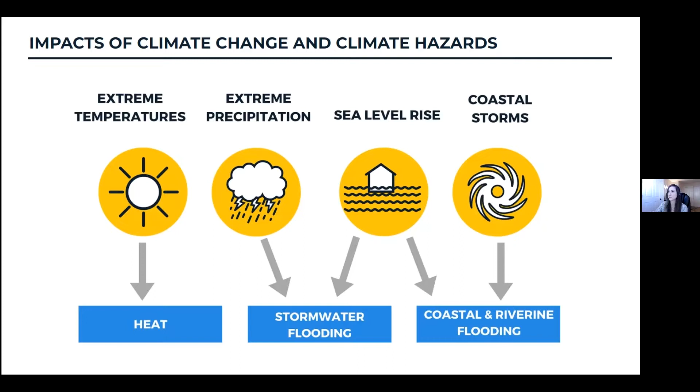In Boston, projections indicate that sea levels are likely to rise from 2013 levels by approximately 9 inches as early as 2030, and by approximately 36 inches by 2070. Plus, there will be an additional 4 inches of land subsidence, which is the gradual settling and sinking of land. Consequently, by 2070 we anticipate approximately 40 inches of sea level rise across the city, or about 3 feet, and storms of greater magnitudes will become more frequent and more intense.

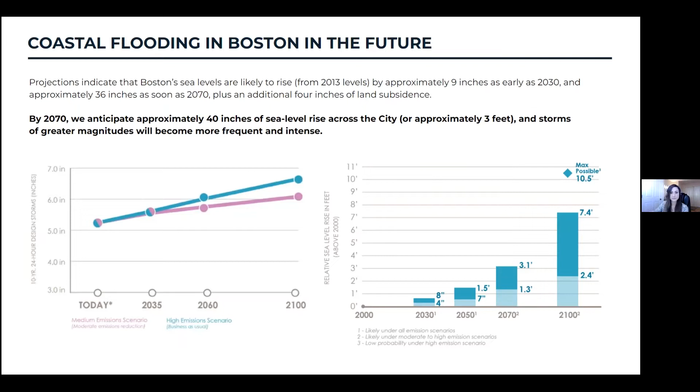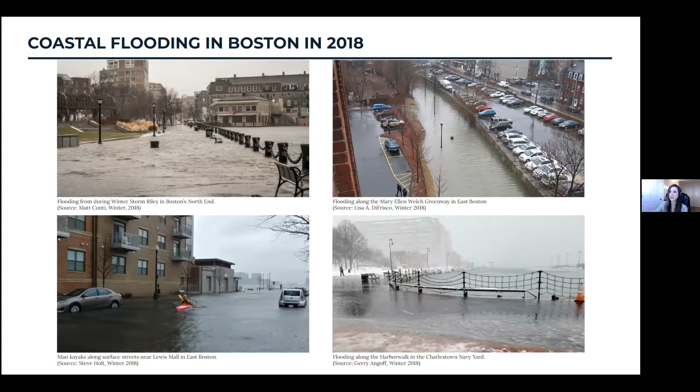The city is taking a layered approach to building resilience. We're working to adapt our buildings and infrastructure to withstand the impacts of flooding and extreme heat and better manage stormwater. We're working to prepare and connect our communities through education and engagement, updating local policy and zoning to reflect climate initiatives, and supporting economic development opportunities through green workforce development initiatives like the recently established Boston Power Corps. And we're working to protect the Boston coastline through our work on the Climate Ready Boston initiative.

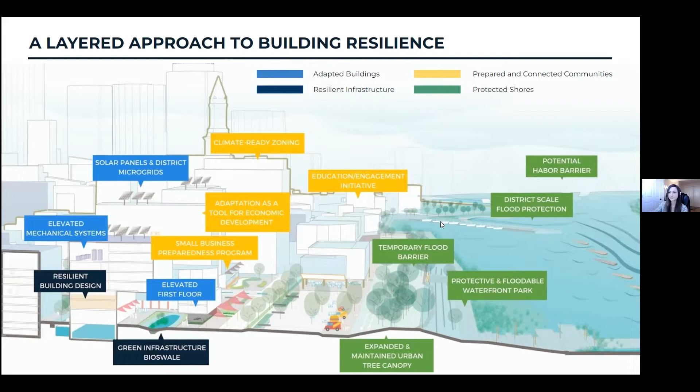For anyone who may not be familiar, and it sounds like we have a few folks in the room who are not, the Climate Ready Boston initiative began in 2016 with the release of the Climate Ready Boston report, which provided updated projections of climate change impacts in the future in Boston, an assessment of the city's vulnerability to those impacts, and a roadmap for adapting to these impacts across the city. Since 2016, this report has evolved into an ongoing initiative that until recently has been largely focused on coastal resilience planning for Boston's 5 coastal neighborhoods.

In 2017, we released the first phase of planning for East Boston and Charlestown. This was followed by a plan for South Boston in 2018, downtown, North End, and Dorchester in 2020, and the second phase of planning for East Boston and Charlestown, which was just completed in August of this year. We're very excited about the release of this recent phase 2 plan, because with the completion of coastal resilience solutions for East Boston and Charlestown phase 2, the city has developed resilience plans for all 47 miles of Boston's coastline.

I want to note that Climate Ready Boston is just one of many efforts across the city to build resilience, specifically looking at coastal flooding. For example, in 2018 the Public Works Department released its climate resilience design standards and guidelines for the protection of public right-of-ways. In 2019, the BPDA released coastal flood resilience design guidelines that provide guidance on building level adaptation strategies. And in 2021, these guidelines were formalized in the city's zoning code as the Coastal Flood Resilience Overlay District.

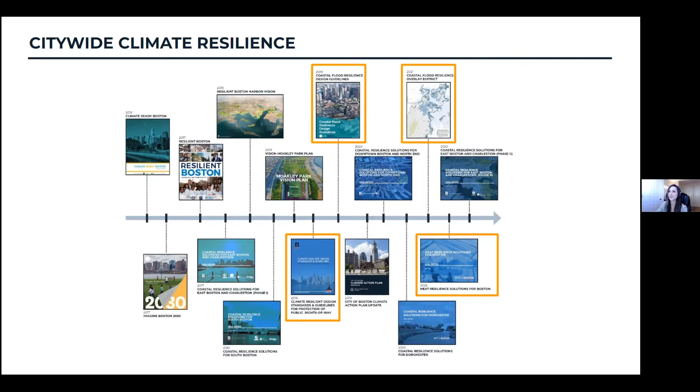All right, so now I'm going to share an overview of the 2 phases of coastal resilience solutions planning for East Boston and Charlestown. This map shows the delineation of the phase 1 and phase 2 study areas. Phase 1, shown in this peach colored line, covered the harbor facing portion of East Boston's waterfront along Jeffreys Point, the Maverick Square area, and the Border Street area.

As well as the northern area of Charlestown along the Mystic River. Phase 2, shown in the red line, built upon this first phase and covered East Boston's Chelsea Creek, around the border to Revere, the Belle Isle Marsh, Constitution Beach and Wood Island Marsh, as well as the Charlestown Navy Yard, the Little Mystic Channel, and the Boston Autoport.

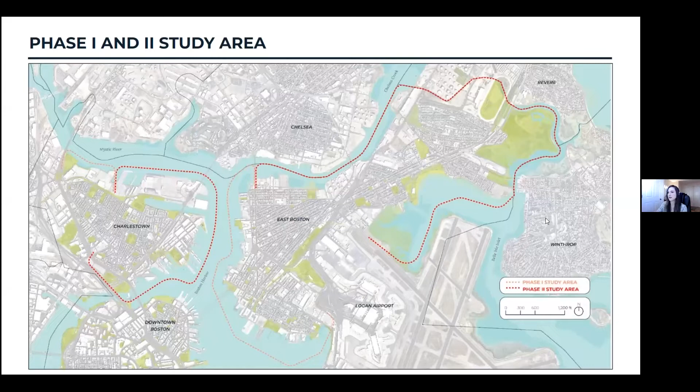So in case you're wondering why these 2 neighborhoods were divided into 2 phases, you wouldn't be the first to ask. While this was before my time with the city, the primary reason that the phase 1 study area was separated from the phase 2 study area was to address significant flood pathways in the phase 1 study area that present extensive near-term flood risk and really needed to be addressed early.

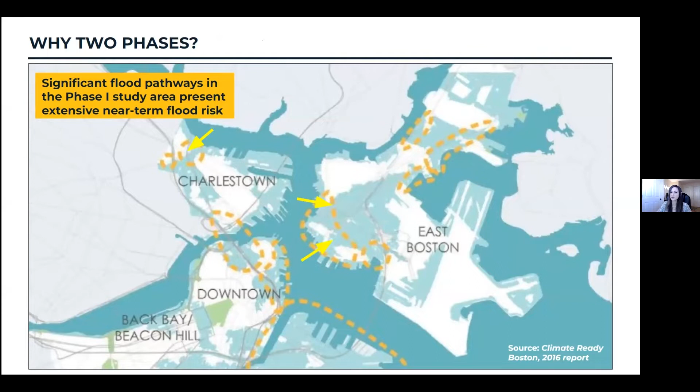With all of the coastal resilience solutions plans that we've been doing, there are essentially 3 key goals and objectives. The first is to identify the precise location and timing of flood risk in a given study area. Flood risk assessments in these plans include sea level rise projections, possible storm surge under different storm scenarios, and wave action and erosion.

It also includes identifying the ways in which flooding can occur, which include either fringe flooding or flood pathways. So fringe flooding typically impacts low-lying areas along the waterfront, whereas flood pathways allow water to travel from low-lying land on the waterfront to inland areas, which is especially concerning given that most inland structures and infrastructure are not designed with flooding in mind.

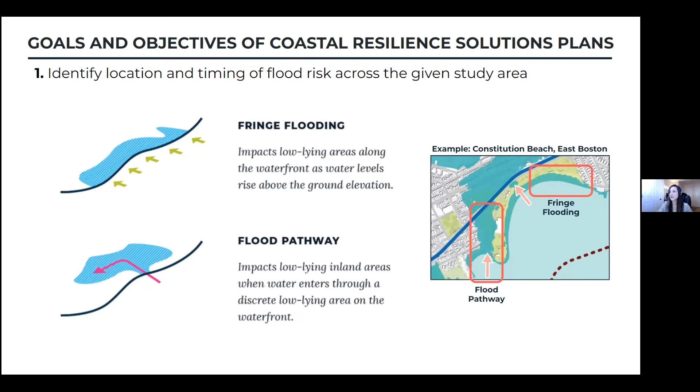So much of Climate Ready Boston's work focuses on blocking flood pathways and reducing fringe flooding by elevating vulnerable areas of the coastline to protect our communities.

So the images to the left show the location of projected flooding in the phase 1 study area, while the images to the right show the same for the phase 2 study area. These images present a near and long-term flood risk.

We consider nearer-term flood risk to include a 1% annual chance storm with 9 inches of sea level rise, which I mentioned earlier is anticipated around the year 2030, while longer-term flood risk includes a 1% annual chance storm with 36 inches of sea level rise that's anticipated around the year 2070.

And as you can see from these maps, without intervention, large sections of East Boston and Charlestown will be vulnerable to flooding at an increasingly frequent basis.

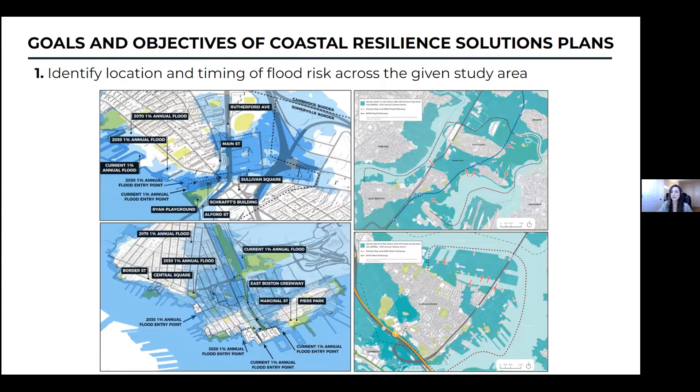The second goal of these plans is to engage stakeholders, including the local community, nonprofit organizations, city, state, and federal agencies, the private sector, and many more, to develop place-based coastal resilience solutions that provide multiple benefits for the respective community, such as increasing permeable open space and promoting multimodal transportation opportunities and enhancing access to the waterfront.

So strategies largely depend on the site-specific location and may include solutions such as waterfront parks, which you'll hear a bit about today, landscaped berms, flood walls, elevating the harbor walk or roadways, or nature-based solutions like restoring wetlands. These plans typically present preferred solutions that encapsulate the most community benefits and ecological benefits, as well as alternative options that would be effective but potentially less desirable.

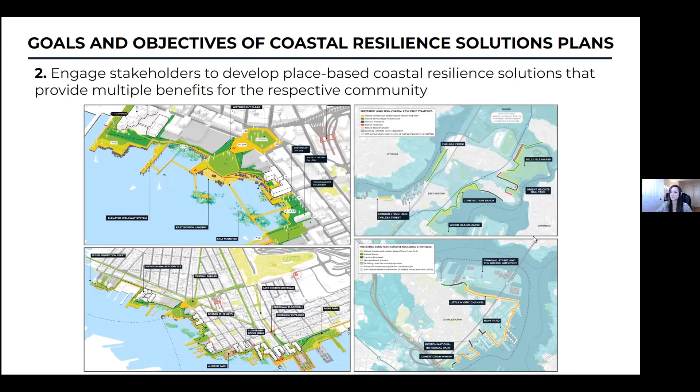All right, so I want to conclude my segment of this presentation by talking about what comes after the plans. The plans present conceptual designs that have been informed by significant community and stakeholder engagement and are deeply vetted for technical feasibility. And from there, each project must go through additional stages of design, engineering, and environmental permitting and compliance before it's ready for construction. And engagement with stakeholders spans all stages of these next steps and is critical for informing what the ultimate form that a given strategy will take.

I think that in doing this work as a planner, folks often worry that what they see in the plans are final and will begin construction as they're presented. But the plans are just the first step in the implementation process and aim to set a framework that comprehensively addresses risk across a large geography.

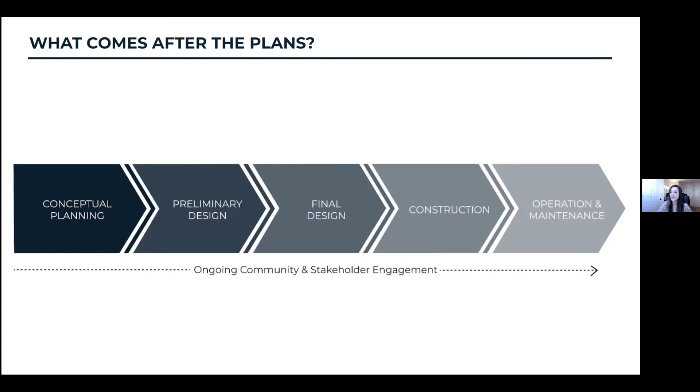Thanks, Kat. I am B. Chatfield, and I'm a landscape architect and project manager with the Parks Department. And so here we are zooming in from our planning process into our implementation, John J. Ryan Playground.

We started our community process a year ago, almost exactly in September of 2021, and we are now in final design and permitting. Our process has taken a little bit longer than our standard parks design process, which is usually 6 to 8 months. The reason for this is we're making a real effort to coordinate with numerous other Charlestown construction projects, and that has been challenging and interesting to say the least.

So if we go to the next slide, we have our Charlestown open space context here. You can see in the upper left corner, this is where the playground is. Ryan Playground is one of the largest open spaces in Charlestown, and it's about 9 acres. Charlestown has an average of 3 acres of open space per 1,000 residents, which is one of the lowest resident to open space ratios in Boston. So this park plays a vital role for the community.

This is just showing all of the other different open spaces, some of which are Parks Department, some which are not, but just to give you a sense of the area. We're not addressing Somerville here and Everett, even though those are municipalities that probably cross the bridge, probably walk over Alford Street and use this space as well.

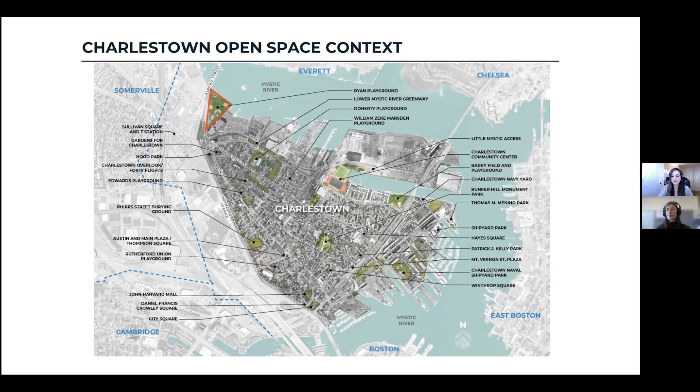So if we go to the next slide, Frederick Law Olmsted did a design for this park, shown here from 1891. The design included a riverfront promenade and alleys of trees, athletic fields. Before this project was implemented, this area was really sort of wetland, and the project spent most of a decade filling the site, and then funding ran out. So it was finally realized with only the ball fields. The original design was never really implemented.

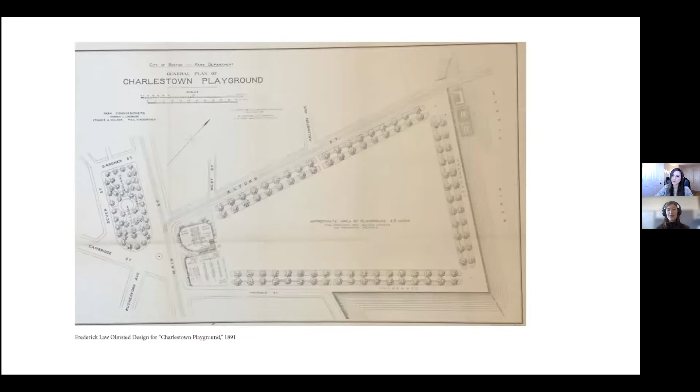Next slide, please. Over time, the park has been whittled away, reacting to the various alignments of streets surrounding it. The waterfront has always remained the same, and it's always been a hard edge with a seawall. You can see here in the 1930s, there was a field house, tennis and handball courts.

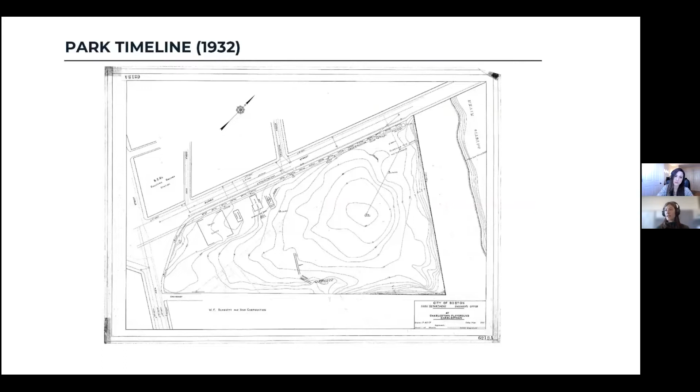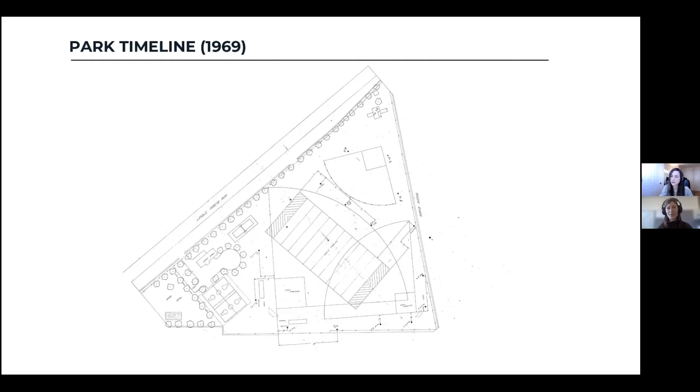If we go to the next slide, we see the current aerial of the park, the edge along the Mystic River. You can see there, it's really a hard edge. You've got a granite seawall with the harbor walk. And there you have Alford Street and Sullivan Square, and you can see our neighbor to the south, the Schrafft's City Center. On to the next slide.

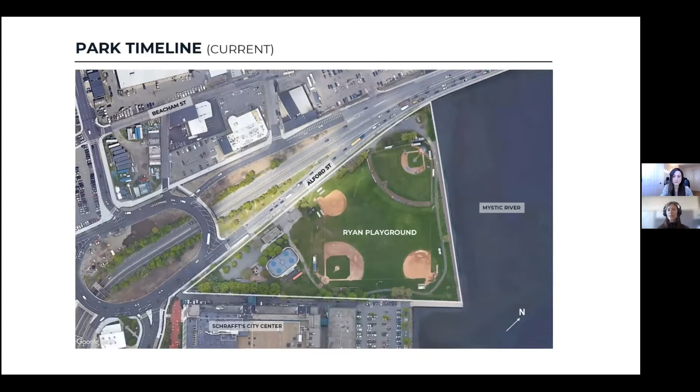This is an existing site analysis. Today we have a children's playground, street hockey rink, a field house, 4 ball fields, and a number of support structures for those ball fields, and large parking areas. There are many mature trees around the perimeter of the playground. You can see some of these blue arrows indicate site access points. All of this is surrounded by fencing. It's a wonderful space, but there's certainly a lot of room for improvement.

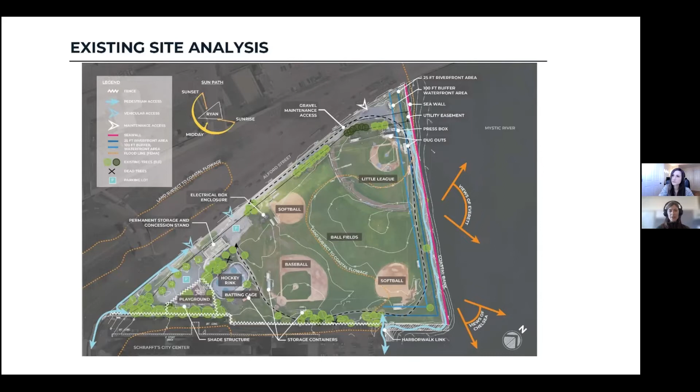We can go to the next slide. So we started our community process working with 2 adjacent projects with what we understood to be similar schedules. Those schedules have since adjusted somewhat, but we have the Rutherford Avenue Sullivan Square redesign with MassDOT and BTD, and then the Hood Green redevelopment. So the outlines of the primary open spaces resulting from these 2 projects, 3 projects really, are shown above, and they're all really a short walk from Ryan Playground.

Parks and BPDA hosted a joint meeting with BTD and Hood Green to ask community members about the programming of these sites and what the priorities were for each. No real surprises as far as Ryan was concerned, because as the largest of these 3 spaces, with its historical use being primarily active recreation, this was deemed to be the best use. So we're going to continue with that use primarily for the site.

But we really wanted to provide a stronger physical connection and openness towards the new Sullivan Square open space, emphasizing that connectivity is a really important step. You can also see there's a proposed extension onto Ryan Playground that will result from the Rutherford Avenue realignment. It's exciting to see that the outlines of the playground are going to start to be readjusted, not quite back to their historical size, but we're regaining a little bit of space, which is great.

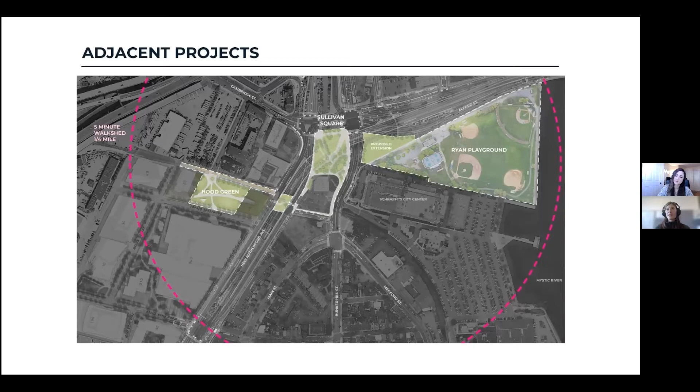Existing conditions and climate resiliency.

Once we had started our public process and had an understanding of what programs people were looking for and how regionally connected we wanted to make our park, we zoomed into the flood risk assessment. We understood this is a flood pathway. This is a very significant project as far as protecting Charlestown waterfront and inland, and Somerville and Cambridge. All of these areas connect to Ryan Playground.

So we did a couple of different models to see what the results were. There's the Boston Harbor flood risk model, and then there's the Mass Coastal flood risk model, which is a bit more conservative. You can see that by 2070, our site is virtually non-existent, so we went with the more conservative model. Right now, the elevation at the water's edge is 6 feet, and we will be increasing it by 16 feet so that we're going to have elevation 22.

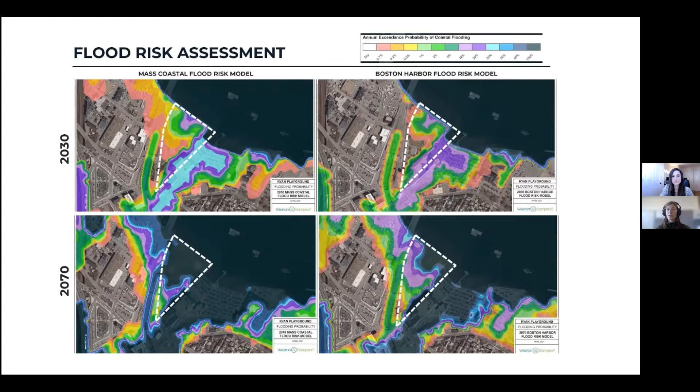This shows the existing flood risk map right now, and you can see our site in the foreground in the white triangle. The adjacent property is the Schrafft's City Center, where you can see the really significant current 1% annual flood entry point in the dark blue. A small portion of that is on Ryan Playground, and that is one of the reasons why we are addressing our site.

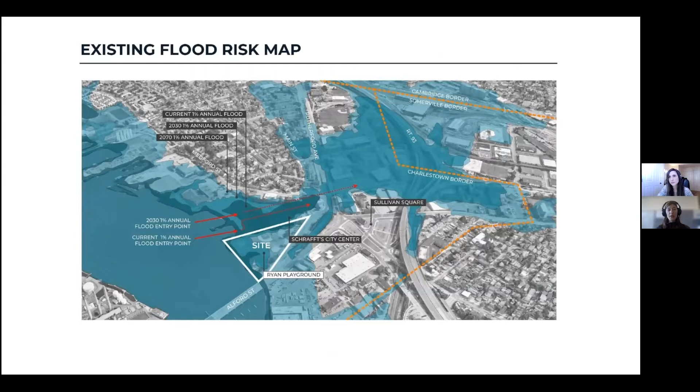But we are also working with that project as well. You can see there's our project with the solid red line going up to elevation 22 at the water's edge. The Shraff City Center has said that they're also going to be going up to elevation 22 as well, so it's really a comprehensive protection zone in this area, really cutting off that flood pathway.

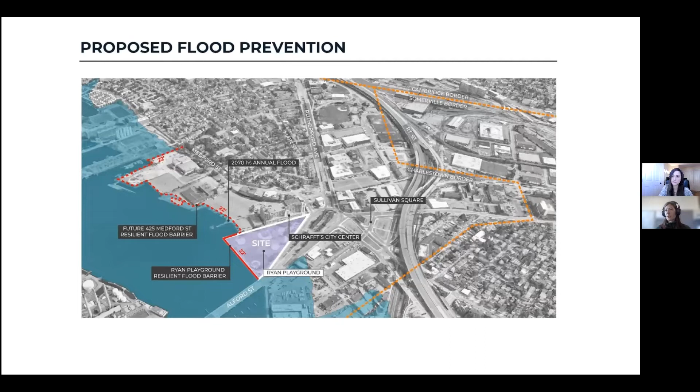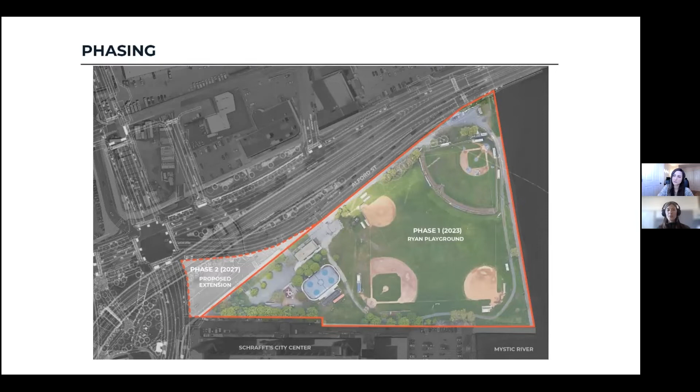This shows the phase 1 playground. Starting over by the water's edge, we have a viewing deck planned. There's going to be a large berm, and that is our flood protection, somewhat inland of the seawall. There are a few reasons for that I'll show in the next few slides.

But right now we have a viewing deck, and then there's a harbor walk. There is a new playground and a splash pad, and trees and shading that we're going to be implementing for the ball field dugout areas. We are certainly aware that heat is one of the elements of climate change that we're trying to address, and bringing water and its use to the park users is something that we're focusing on in our various park renovations.

We also have other recreation benefits here: adult fitness areas, ways for people to gather and enjoy the view over the harbor and the river, looking out at Everett and the river. Right now its existing condition is ball fields up to the edge, which is great, but we're really trying to allow people to gather at the water's edge and appreciate it, not just retreat from the flooding. We also have 4 ball fields shown here, pickleball, we're relocating the existing hockey rink and reducing the parking areas.

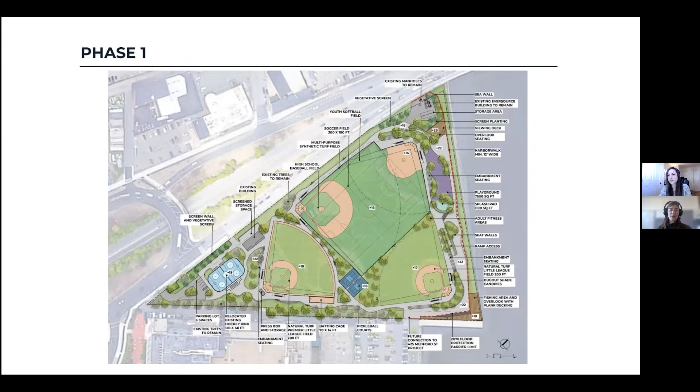If we go on to the next slide, we'll see the preferred plan in all phases, with the additional wedge of land we're trying to engage more physically with the new Sullivan Square open space, along with an entry plaza with a shade structure, seating, and bocce courts.

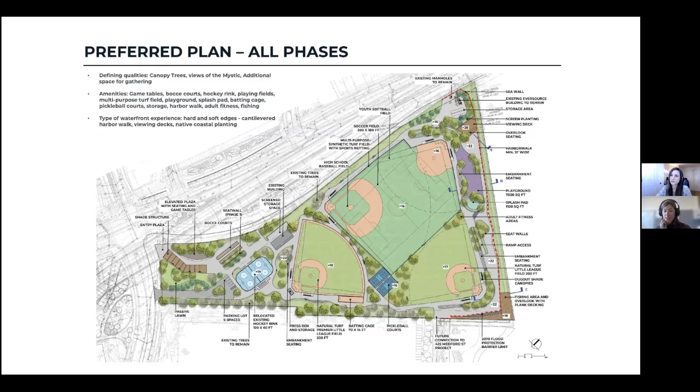Before we move to the next slide, I want to indicate that along the water's edge we've got three section lines called out: Section A, B, and C as you move down the water's edge. If we go on to the next slide, these sections are cut through those areas.

One reason is that the seawall is Army Corps, and permitting would be very challenging, but primarily it's in acceptable condition, though it's an engineering issue if we wanted to build directly on top of it and elevate that way. There's also a 24-inch diameter medium pressure gas line inboard of the seawall, so we couldn't build a berm on top of that.

As of now, our project is in permitting. We may be required to do an environmental impact report, which has bumped our construction timeline back a little from what we originally anticipated. We're now looking to break ground in spring of 2024.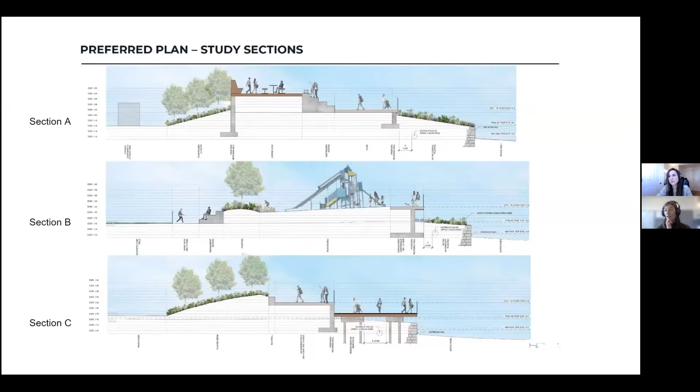And so with that, I want to turn it over to the East Boston Resilience Waterfront project.

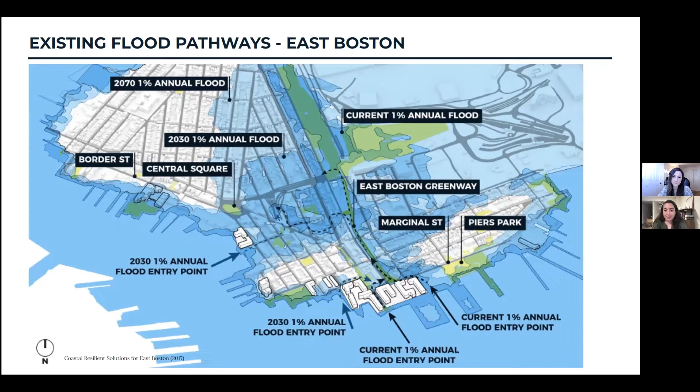You can go to the next slide, please. I want to call out that I'll be talking about the projects happening in the highlighted areas of Carlton Wharf and Lewis Mall, where these flood pathways are significant. These were identified as high priority, as Kat mentioned earlier in that graphic you saw.

In the next piece of the presentation, Allison Perlman will actually be talking about some of that inland area along the Greenway. But I'll be walking through these two project sites, Carlton Wharf and Lewis Mall, Lewis Street area. Next slide.

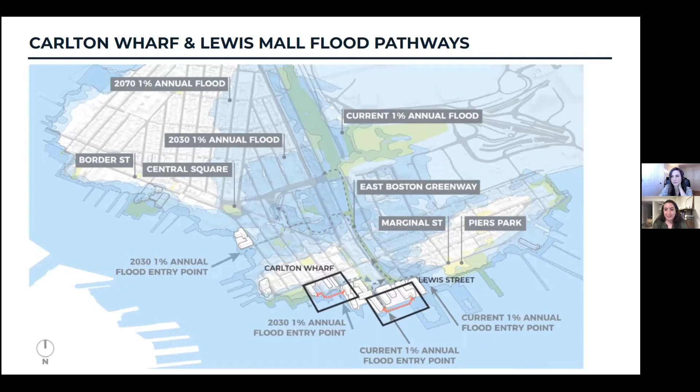Before getting into the projects themselves, I'd like to go through with you all where we are in terms of funding and just the process in general.

Following the identification of these areas for near-term implementation, the BPDA applied for the state's Coastal Zone Management, or CZM, grant. This happened in September of 2020, and that month the BPDA was awarded $300,000 from CZM for the technical analysis and development of resilient design options for East Boston's waterfront at Carlton Wharf and Lewis Mall.

In October of 2020, the BPDA board voted to approve accepting these funds, and an RFP was issued to complete this phase of the project.

Weston and Sampson was the successful respondent, and over the next several months they worked alongside the city and the public to produce preferred design options for the site areas, which I'll be showing in the next couple of slides. In association with Weston and Sampson were Stoss Landscape Urbanism and Woods Hole Group as part of the consulting team.

This year, after completion of the first 20% design phasing, the BPDA is currently applying to FEMA's Hazard Mitigation Grant Program, HMGP, as a sub-applicant with MEMA, Massachusetts Emergency Management Agency. We're working with AECOM on the application, which is due this December, and coordinating with other city departments like CAT and Environment, as well as Massport, the MBTA, and adjacent property owners.

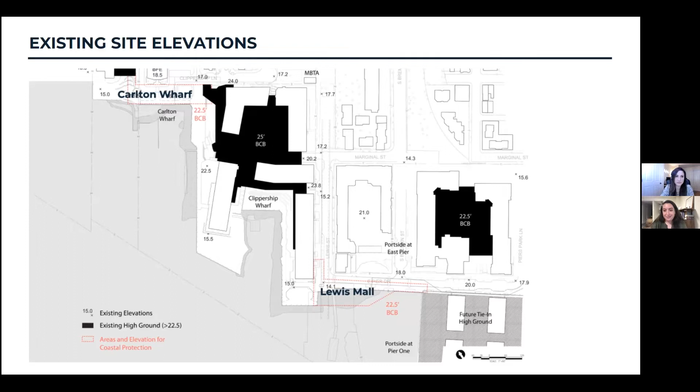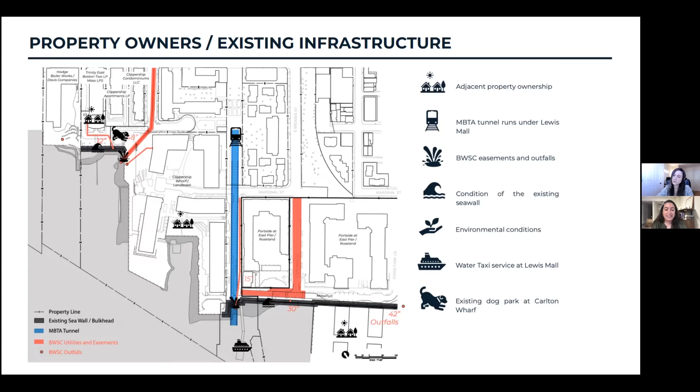As my colleagues have mentioned, all of this requires coordination with many stakeholders. This map lays out the adjacent property owners, as well as existing infrastructure and other agencies that must be accounted for in the engineering and design concepts to finalize permittable and buildable solutions. In addition to adjacent property owners, there's the MBTA tunnel running under Lewis Mall, BWSC (Boston Water and Sewer Commission) easements and outfalls, the condition of the existing seawall, environmental conditions, the water taxi service at Lewis Mall, and an existing dog park at Carlton Wharf.

The images I'm showing now, please take them all with a grain of salt. Remember, this is all at 20% design. None of what you're seeing right now is final, but rather the beginning stages of what is to come.

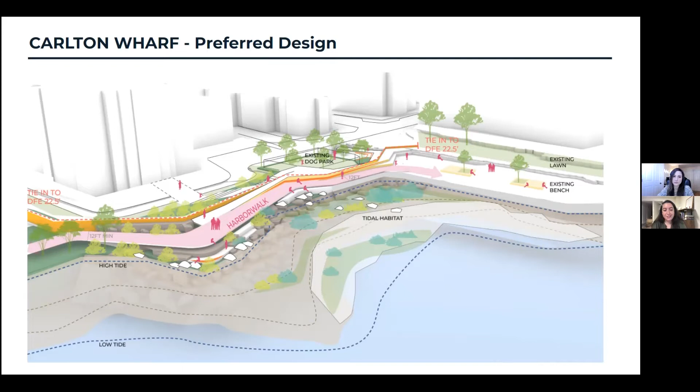Here is the preferred design that came out of the Weston and Sampson report from 2021. Carlton Wharf provides a flood alignment that ties into the high elevation marks of the Marriott and Clippership Wharf, which are at 22.5 BCB. This design preserves the existing dog park, enhances the existing natural landscape, and enhances views of downtown Boston. Along the side street, the approach to flood protection is through a gently sloped landscape with planted trees and native plants, which also help mitigate heat.

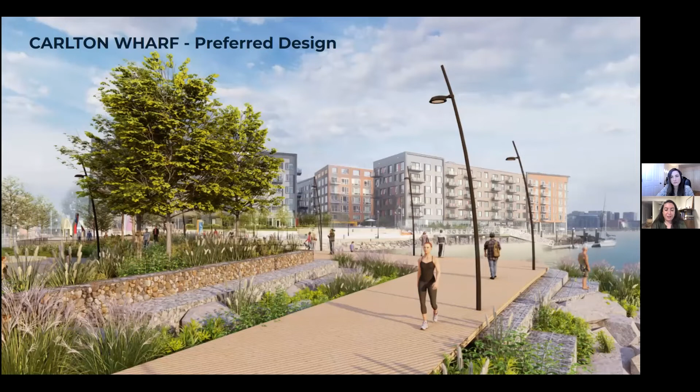This is just a sample rendering, again designed by Weston and Sampson and their team from that report, which there will be a link to in a later slide.

Now, with Lewis Mall: over the course of the Weston and Sampson CZM grant period, they developed a couple of solutions. Ultimately, based on community feedback, a phased approach was brought to the table. This phased approach helps increase flood protection and public realm improvements over time, focusing on mitigating existing and near-term flood risk. There are opportunities to expand into the public rights-of-way at the end of Lewis Street to create a larger landing space to accommodate changes in grade, and the feasibility of expanding into the waterway would require coordination with state and federal regulatory environmental agencies, which is why this phased approach is being used.

Phase 1 utilizes the existing right-of-way as a limit of work to establish an interim design flood elevation of 19.5 BCB. This design prioritizes accessibility and movement along the waterfront while providing flexibility to be built upon in the future to reach that 22.5. This approach provides protection during near-term flood events while the grander, more complex phase 2 design is being funded, permitted, and fully designed. The phase 1 approach, with a design flood elevation of 19.5 BCB, reduces the fill needed for coastal protection and allows for a less obstructed view in the near term.

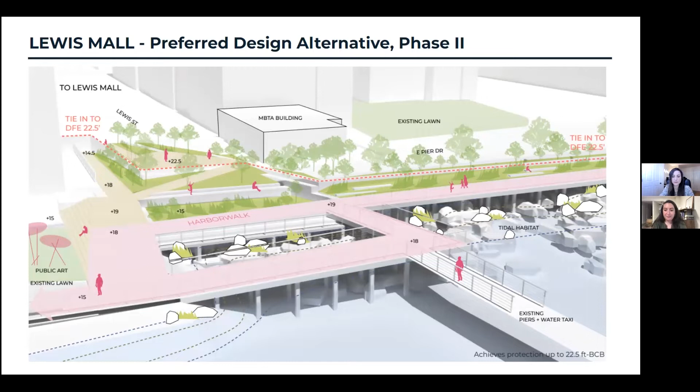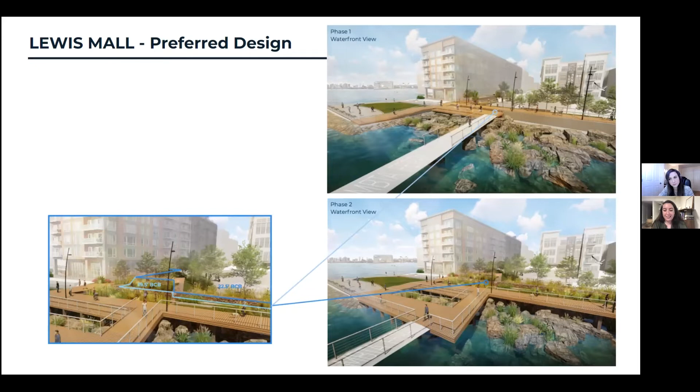This project has years to go. I invite folks to continue engaging with us at the BPDA on this project. The HMGP grant is just the next step in this phase. We want to build something that is right for all of the stakeholders involved. We are working with the property owners right now, with the different state and local agencies, on getting this grant through so that we can begin the process of bringing those early designs to full buildable design solutions for the future. So please feel free to reach out to us and work with us together to make this possible.

And now I'll pass it to Allison to round out the presentations.

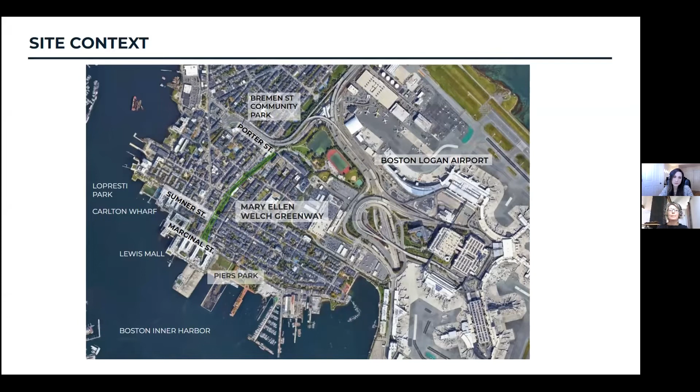East Boston, as we know it today, was very early on a series of islands inhabited by indigenous peoples and supported a landscape of hunting and fishing. Over time, the lands were filled, like much of Boston's history that we heard about today, and by the early 19th century East Boston was a center of shipping and trade, and with that came the need for rail lines. The Mary Ellen Welch Greenway was a reclamation of this former urban infrastructure, the Conrail Railroad Corridor. Today you can find remnants of the Greenway's past, including old rail tracks, a Conrail caboose affectionately referred to as the Blue Caboose, and a low-lying corridor now surrounded by a dense urban environment and a series of parking lots.

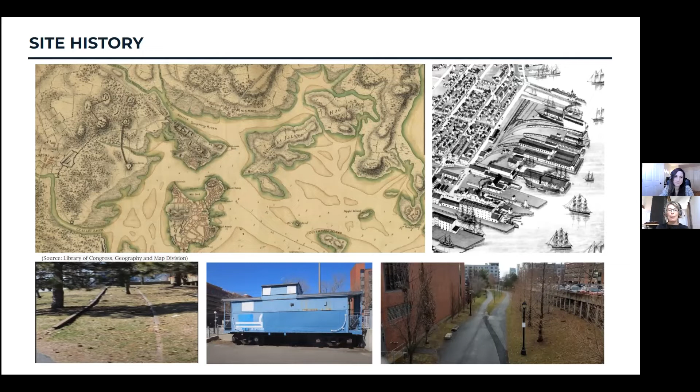Today the Greenway is used at the neighborhood scale as a backyard for families to safely teach their kids to ride bikes, or provide valuable open space in this dense neighborhood. It's also used as an active and vital corridor for connecting residents to each other, local businesses, and work, and future envisioned Greenway extensions can serve as regional connections. In recent years, through the hard work of the Friends of Mary Ellen Welch Greenway and other organizations, programming and small projects have been inserted into the Greenway, adding vibrancy, community connection, and resiliency education.

The Greenway is a landscape of opportunities and challenges. In a neighborhood disproportionately impacted by climate change, the site is one of the greenest places in the neighborhood, with an extensive tree canopy providing needed heat mitigation. The site is also surrounded by an active and vocal community and organizations eager to participate in its transformation.

There are also some site challenges. The site history of the old railway corridor has created this elevationally low-lying landscape, which is prone to flooding. Existing elevations put the site at risk during a current 1% annual chance flood, with flood depths projected to be over a foot at the entrance. In addition to coastal flood risk, this low-lying open space is a collection point for site and adjacent property stormwater, and exhibits high groundwater elevations.

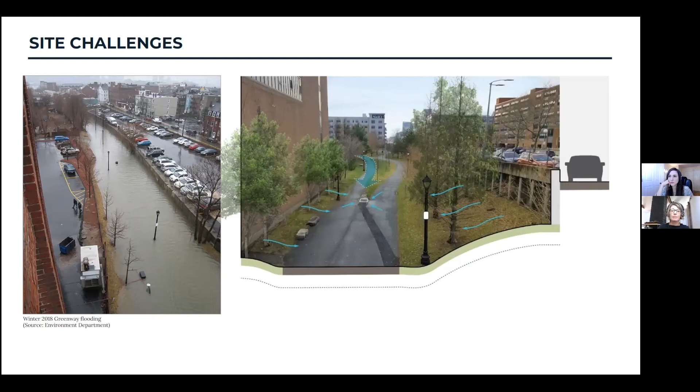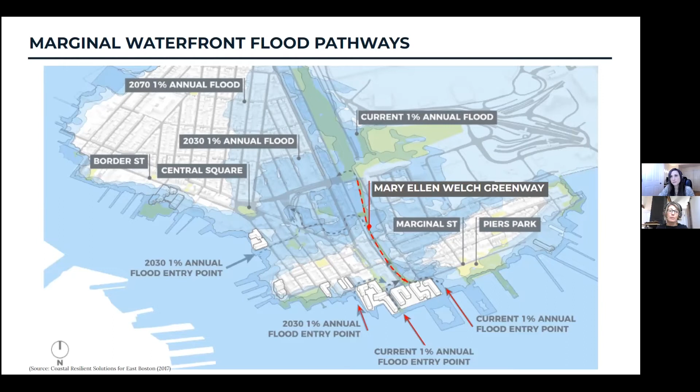This is the same graphic you've seen in the previous presentations, showing the existing flood pathways and also future flood pathways. The Climate Ready East Boston Phase 1 report highlighted flood depths at the Greenway could be as much as 2.5 feet by 2030 and close to 5 feet by 2070. The Greenway flood pathway not only impacts the Greenway, but serves as a corridor for floodwaters to the rest of the neighborhood.

So what's the big question, right? What are we going to do about this? That's kind of the conversation for today.

So far, the city has implemented the Greenway flood wall at Sumner Street, and when deployed, provides protection from coastal flooding up to the current 1% annual chance flood level, plus 1 foot of freeboard. Beyond the storm, though, the water goes around the flood wall from Border Street.

For a number of reasons, the strategy has been deemed short-term. One, the rising sea levels may prove too much for the system to address. And second, the city of Boston continues to research other cities affected by recent hurricane events and their successes and challenges with resiliency efforts.

One of the lessons learned is that deployables should only be used to address immediate flood risks, or in areas where deployable is the only feasible solution, such as transportation corridors. In times of crisis, deployables present an operational challenge. In the event of deployment, dedicated teams and equipment have to be dispatched, potentially simultaneously, to numerous sites across the city, which is a logistical and organizational challenge before and after storm events, when our teams are needed elsewhere for other important city operations.

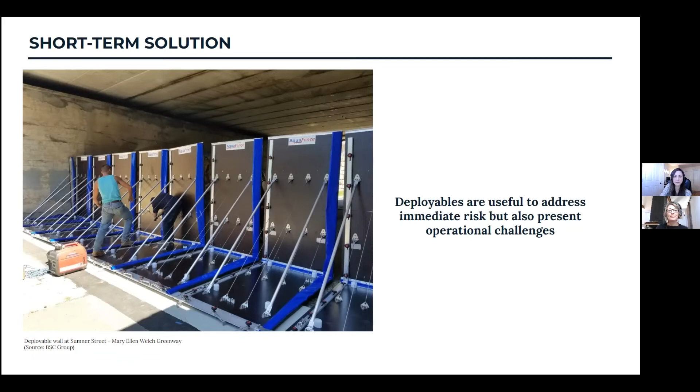So our project is really early on in the site investigation and community engagement phase. We're working closely with our design team, Weston Sampson, and Friends of the Mary Ellen Welch Greenway. However, we acknowledge that any long-term solution for the Greenway will be anchored in, one, community input.

What we've heard continually from the community in all neighborhoods is that there's a need to address resiliency in all projects, from heat to flooding and biodiversity. Specifically from the East Boston Climate Ready Phase 1 process, we heard there's a strong preference for passive green resiliency solutions, and our ongoing conversations with the community highlight the need to provide resiliency while also addressing everyday needs.

The second is neighborhood level coordination. What you've seen today in the presentations is that it's going to take more than just one project to create these barriers in flood protection. So we're working closely with other city departments, Massport, and other landowners to better understand how our projects support one another's resiliency efforts and create a network of open spaces which serve the community's needs.

Long-term solutions also require comprehensive site analysis to understand existing conditions, past improvement projects, and the successes and failures of them, and then future flood elevations. We can see that data keeps on shifting a little bit, so we need to keep up with the current data and make sure that our elevations are tying into others' elevations.

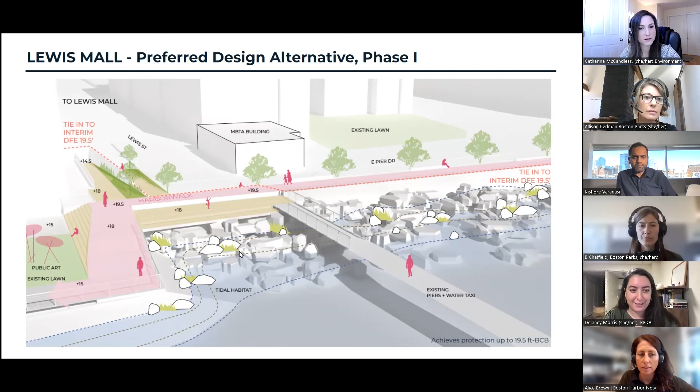Let me know if this is the right slide, if you want to jump in on that question. Maybe pull up the third slide of my deck. This one? That one. Yeah, right. So as Alice is saying, there's elevation changes constantly.

So for these two projects, for example, Carlton Wharf acts as a tie-in between that Clippership Wharf 25 BCB area and the elevation you can't see at the top left of the screen. And Lewis Mall acts as the tie-in between that building just to the left of it, and the Piers Park Massport site, as well as that 22.5 BCB, the right-hand black block of elevation.

And so this is the sort of thing that we would be looking at when doing these redevelopments. It's something we would be looking at when doing 425 Medford, any of these other projects, to make sure that there aren't any holes and gaps in these areas.

We look at where the flood pathways are. In some instances, the flood pathways are actually just fringe flooding, as Kat was mentioning earlier. So every site is different. Every site has these different considerations to look into. But overall, our intention is to make sure we're not leaving open those major flood pathways, and we are taking into account all of this elevation change, all of these very highly specific details on every project.

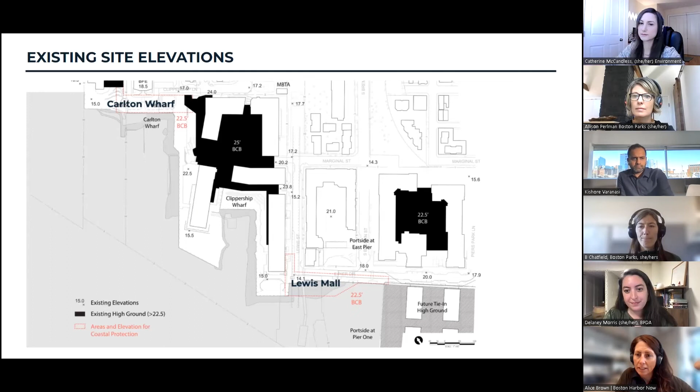Great, thanks. I have a couple of questions from Lavi. The first one, she asks about the park going through MEPA review, so presumably Ryan Playground. Could you explain why the DEIR is needed? For those following along at home, that's an environmental impact review. Why it's needed and what additional designs or details are being required. Is something about the design that requires something special?

So this is a new requirement that we discovered, as of January 2022. There are requirements having to do with whether or not your project is located in an environmental justice neighborhood. So it's a good origin for the additional scrutiny, I think. The idea is that if you have a project within a mile of an environmental justice neighborhood, there is additional reporting that has to happen, and then an environmental impact report could be required.

We're actually in the process. We've done our notification, which is the first step. And they're going to let us know after they review that if we need to do an environmental impact report. The idea is that for years you have these isolated language isolation areas, low income areas, or underserved, whatever falls under the umbrella of environmental justice. There have been a lot of projects that have gone on without awareness by those communities, lacking their ability to participate and create any direction there.

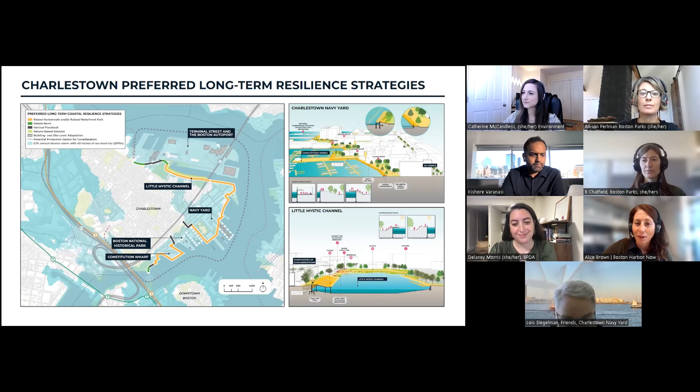Great, thanks everyone once again for joining. We could have gone for another couple hours maybe, but it goes to show that these problems are complex and it's not just the city that is responsible. All of us have to play a role in making this successful. It's great to see all four of you, Kat, Allison, B, and Delaney, really dedicated to making sure that we're all safe, secure, and also friendly to our environment.